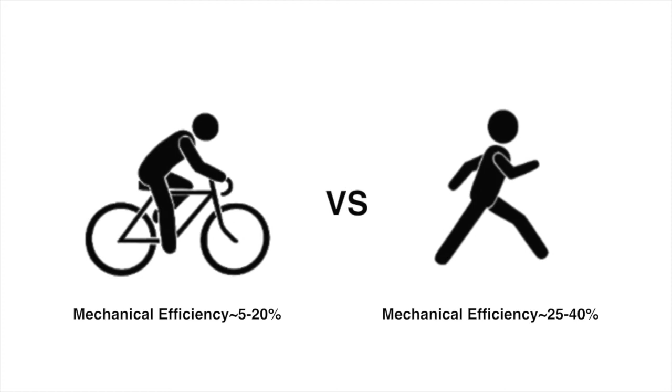The two main methods of harvesting human power for motion are cycling and walking. We investigated the power transformation mechanisms and found that the mechanical efficiencies of cycling and walking are 5 to 20% and 25 to 40% respectively. So, we decided to use walking to power our shredding mill.

Our design for harvesting human power featured a high natural gearing ratio, which eliminated the need for a gearbox, a flywheel for power smoothing, and a diameter of 2 meters to fit the 95th percentile of user heights.

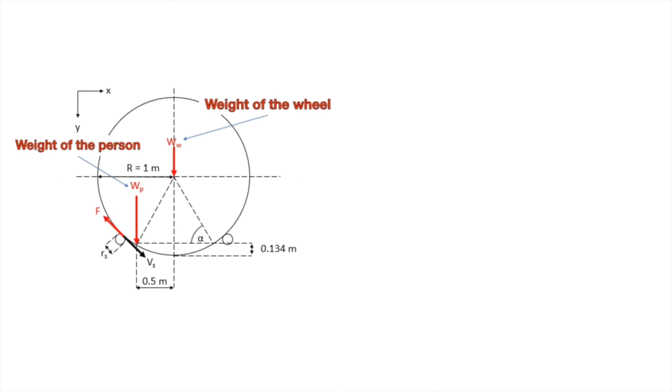We theorized that using a circular treadmill would enable us to harvest power from the change in gravitational potential energy of the body's center of mass, as well as muscle power.

However, gait analysis of the system shows that the gravitational potential energy of the upper body does not contribute, as the hip and shoulder do not move in the vertical direction.

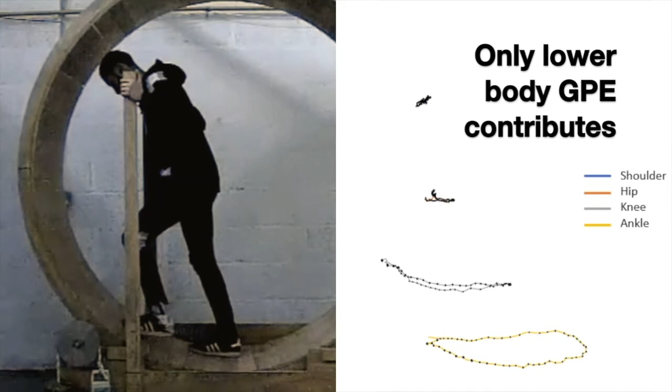A prototype shredding mill was built to determine the most effective material for threshing rice straw. The results of testing showed that a combination of rigid metal bars and blades were most effective.

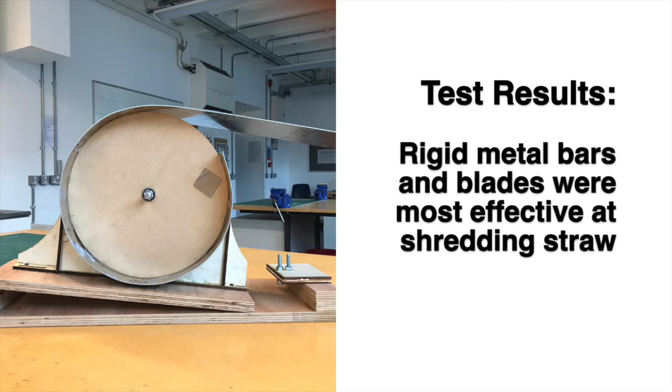From analysis of the test results, several key optimizations were proposed. For the wheel, the tolerances in the base section were reduced to minimize friction, and handrail ergonomics were improved.

For the shredding mill, the diameter of the mill increased from 300 to 800 mm. The gearing ratio was also increased from 2 to 1 to 3 to 1, and finally, steel blades and rods were used as the threshing mechanism.

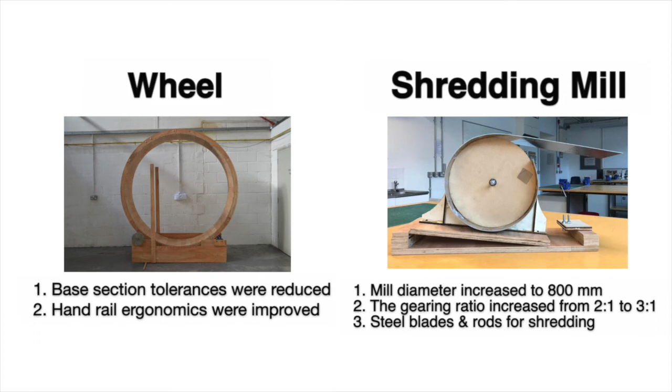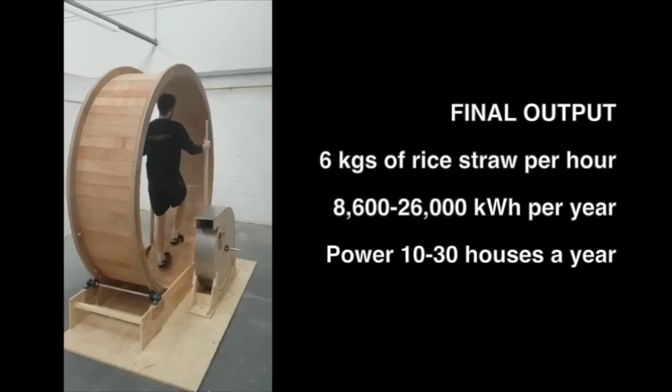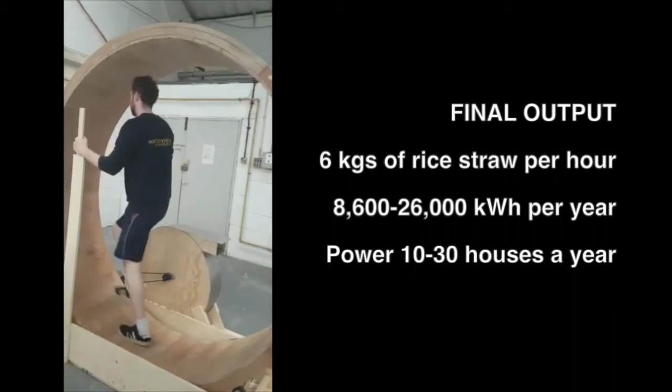Our final design output was able to shred 6 kilograms of rice straw per hour. If the system was powered for 6 hours a day, 5 days a week for a year, our design could produce between 8,600 and 26,000 kilowatt hours per year. This is enough to power 10 to 30 houses in a developing country.